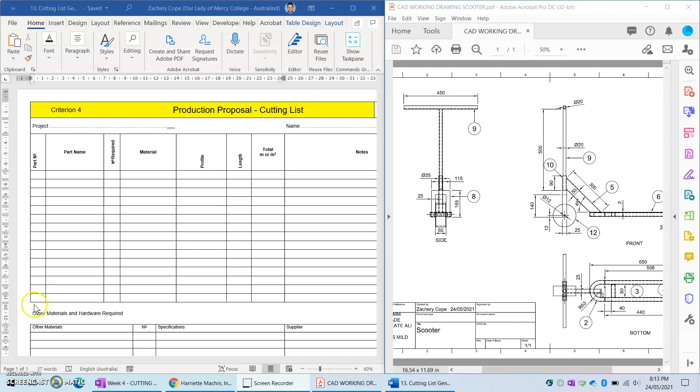In this video I'll show you how to create the cutting list for the scooter. Let's begin with looking at the scooter deck. So we've got this bar here, number 3, which runs kind of the length of the scooter, about 558 mil. It's square tubing and it's 25 millimeters thick.

So up in here I'm going to put in part number, let's start with number 3 I guess. Part name, let's call this the deck rail. The number required to make this is 2, and the material would be mild steel. And the profile will be 25 by 25. Mine's 2 millimeter thick, square hollow section tubing.

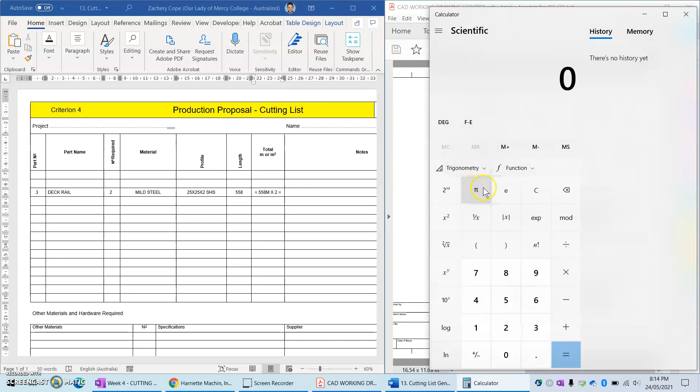Okay, the length of this would be 558 millimeters. So its total in millimeters required would be equal to 558. So I'll put that in meters. Meters times 2, which is equal to, let's pull up the calculator. So we get 558 divided by 2. 558 times 2 is 1.116 meters. Okay.

Now let's look at the next component, part number 2. So part number 2 in this is actually the curved end. Curved end. One's required, made of mild steel. This is also 25 by 25 by 2 SHS or square tubing. The length of this one is a bit tricky.

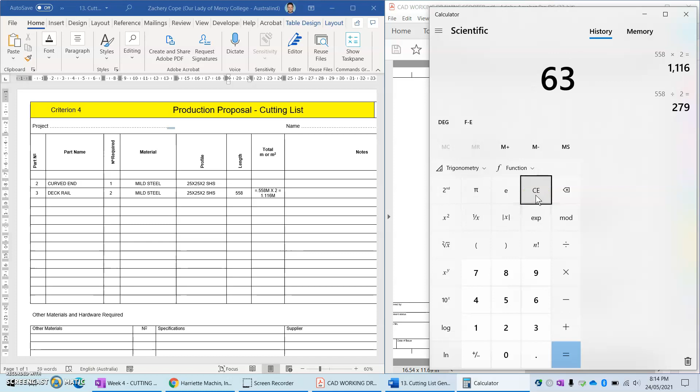This one we have a curve or radius of 63 millimeters. So it's going to be the circumference of a circle divided by 2. So let's get our calculator. So we have 63 is the radius times 2, that's the diameter, times 3.14, just pi. Divide that by 2, so we need 197 millimeters, so 0.197 meters. Okay, so let's put this in here, 0.197 meters.

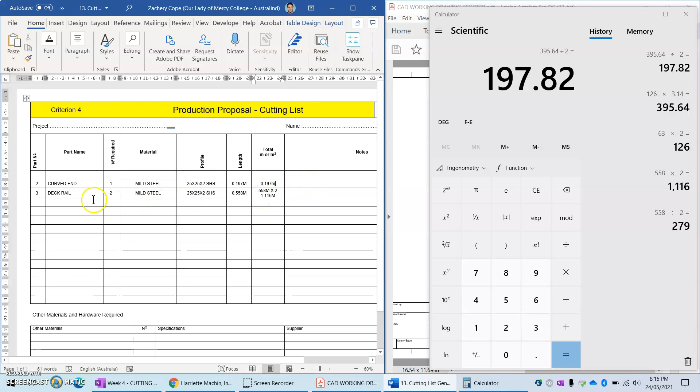Okay, the next component, let's look at part number 4, which is this little component here. So part number 4, we'll call this the deck. In timber we might call this stiles, so I'll just call this a stile. 2 is required, mild steel, 25 by 25 by 2 SHS. The length of this is 80 mil, so 0.080 meters. So times 2 is 0.16 meters.

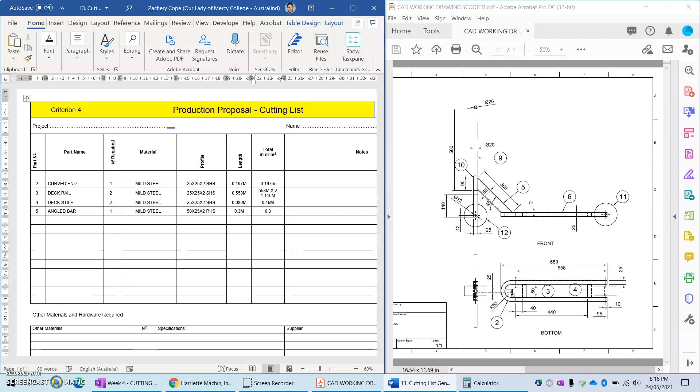Right, part number 5 is this angled component. So we'll call that one the angled bar. We need 1. It's also made from mild steel, and this stuff is 50 millimeters by 25 by 2 rectangular tubing. So it's rectangular, not square. The length of that is 300 millimeters. So that's going to be 0.3 meters, and its total length would be 0.3 meters because we need 1. And for the notes, we're going to put in cut ends at 45 degrees on cold saw.

Okay, now we're up to part number 6, and on my particular scooter, it's actually the deck top. So there's actually a little plate, a thin plate of material on top. So deck top. 1 is required. Okay, so this is going to be made from plate, aluminium, 2 millimeter plate. So this one doesn't really have a length, but it does have kind of an area. So the area required for this one, you'd cut out a square sheet.

So I'm going to go with 650 for the length and a width of 80 plus 50. That's the whole width, so that's going to be 130. So here we have 0.65 meters times 0.13 meters. So the total area would be 0.65 times 0.13. So we're going to have 0.0845 meters squared.

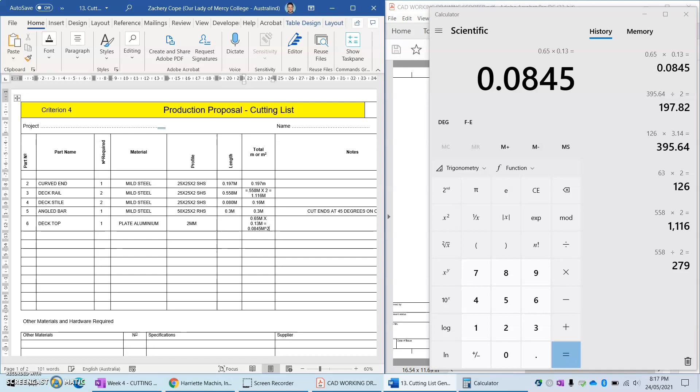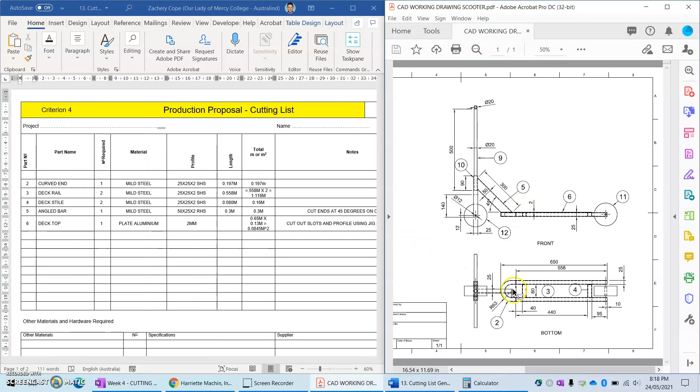And my notes would be cut out slots and profile using, we might use the jigsaw. File, smooth. Okay, up to part number 7. If this one has a 7, my particular design doesn't have a 7, we'll just move on to 8.

So number 7 in my design, it's not on there, but let's have a look at this particular. So if I made this the fork, this would actually be 3 pieces. So I'm going to make the top of the fork here, this component, this part that's going sideways. Let's see, so fork, horizontal bar, and I need 1, and this would also be mild steel at 25 by 25 by 2 SHS. The length of this bar is 115 mil, so 0.115 meters.

Okay, number 8 would be the vertical fork bars. 2 is required. Its length here would be 165, but I'm going to take 25 because this bar is going to come in first. So that's going to be 140 mil. It's also made of mild steel, 25 by 25 by 2 SHS, and that's going to be 0.14 meters. And there's 2 of them, so it's going to be 0.28 meters.

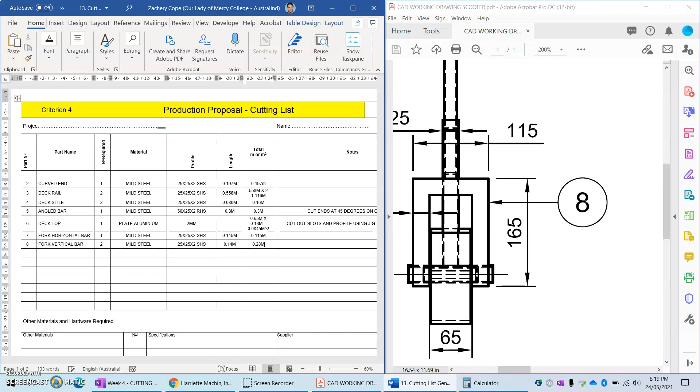Okay, number 9. So look back on the design. 9 is actually the handlebar component for my work. So let's go to the vertical handlebar. So this vertical piece is, I need 1, and it's 500 millimeters in length, made also of mild steel. This stuff is going to be 20 by 2 CHS. That means 20 millimeter diameter, 2 mil thick, circular section tubing, and the length is 0.5 meters.

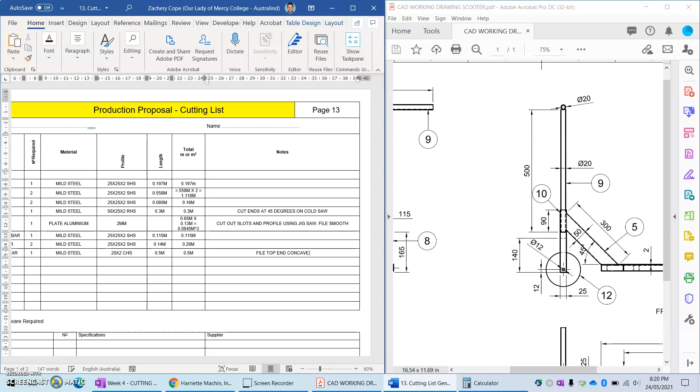And I'm going to put a note, file top end concave to fit horizontal bar. So I want to file the top of the bar so that it fits nicely into this area here. So let's see, part number 10. We're going to go the horizontal bar, handlebar. I need 1. It's also made of mild steel, same material, and this time the length here is 450.

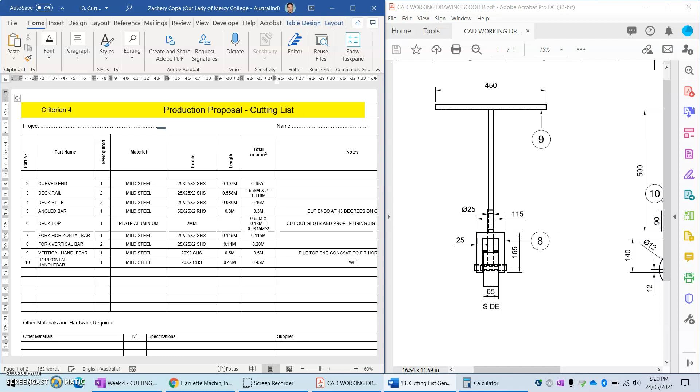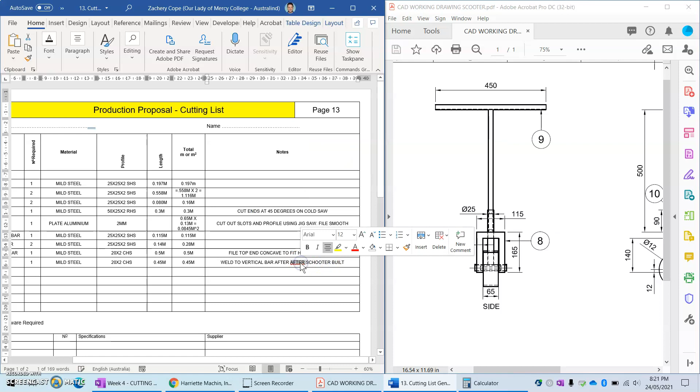Okay, so my note would be weld to vertical bar after, it's really important that I weld this bar on top of this bar only after I've built the scooter. After scooter built. Okay. Let's see if I got everything. Okay, now I'm missing a piece.

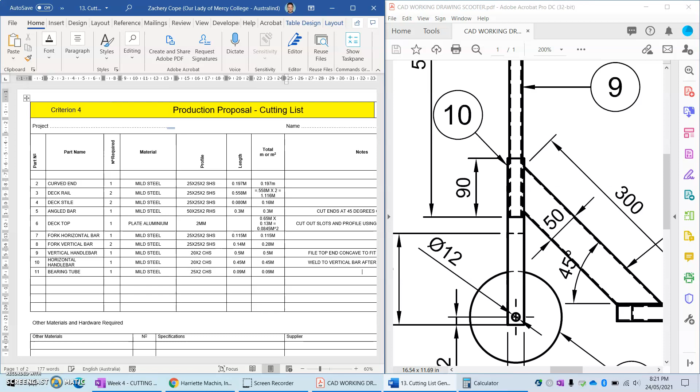So number 10 is actually this tube here that's attached to the angle bar. This would usually contain the bearings. So I'm going to call that one my bearing tube. I need a new number actually. I've changed that one to 11, but let's go. The bearing tube, one of those. That's also mild steel. And this profile is going to be 25 by 2 circular hollow section tubing, 90 mil length. It's actually 0.09. Okay. So there we go. We've got pretty much this thing here.

Any other materials required? I'm going to need 2 wheels. And specifications, I believe these wheels are 120 millimeters diameter, but I will check those. I think we bought some at Bunnings. Okay, I'm going to need some axles. I'm going to need 2 of those, and they're 12 millimeter bolts. And the length of those would be about 60 mil width plus 50. It's about 120 millimeter length.

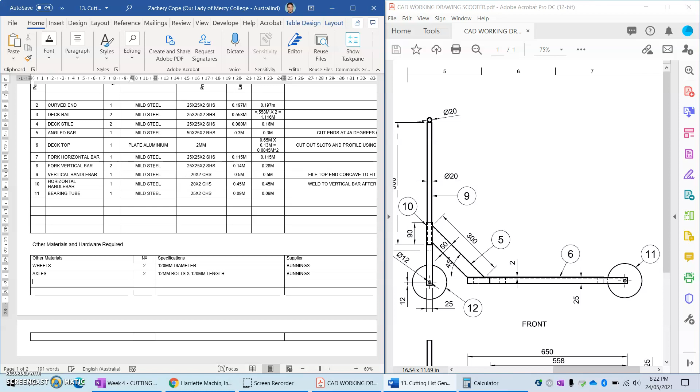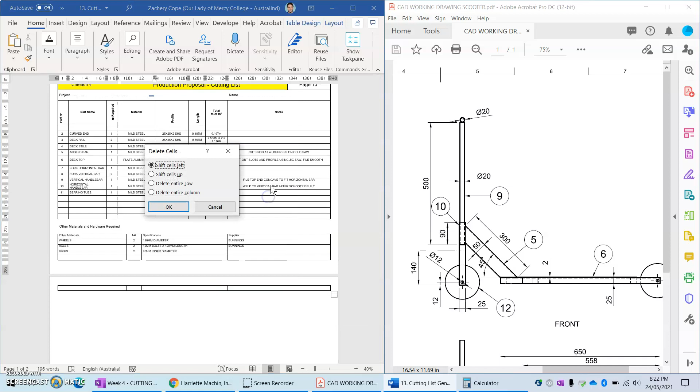Also from Bunnings, let's see, what else might I need for this? I need some grips, so I need 2 of those, 20 millimeter inner diameter. So let's have a look at this whole form. Okay, I've got an extra line here, so I'm just going to delete this row. Okay, so this here would be all the parts required to cut this scooter, as you can see in the picture.